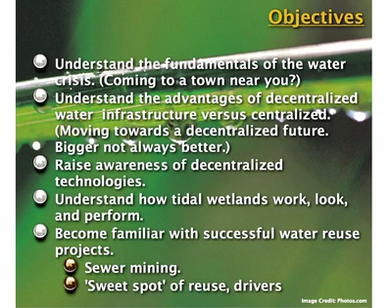I'm going to explain how tidal wetlands work, look, and perform, and then I'm going to review successful water reuse projects and introduce the concept of sewer mining, and maybe most important, what is the sweet spot of reuse, meaning economically, where do the systems make the most sense?

In addition, we'll hopefully have time to walk through the water reuse planning tool, which I think will be very helpful and remove some of the mystery. It's complicated, but it's not rocket science.

I will touch on some of the new regulations that might be moving east. It turns out that California, with Title 22 reuse standards, as well as some new ordinances in the city of San Francisco, should be of interest, as many water regulations start west and move east slowly. And then we're going to touch briefly on a recent EPA and WERF, Water Environment Research Foundation, study as well.

Please don't hesitate to ask questions if you have them. Let's start off with some slides, and the purpose here is to just put the water into context.

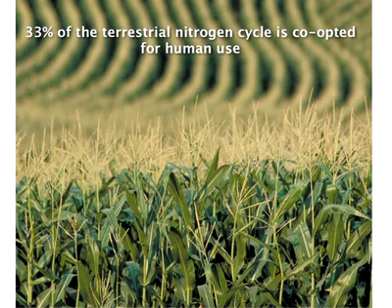25% of the terrestrial rainfall is co-opted for human use. That's a lot of water that we're taking out of the water cycle. 33% of nitrogen is also co-opted for human use. There are over 850,000 dams in the United States — kind of an amazing number.

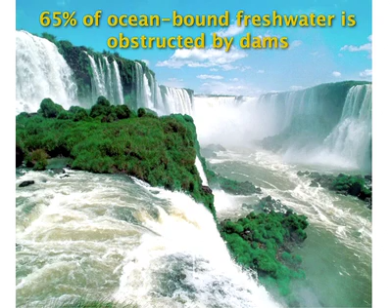Humans have radically changed life on this planet as we know it. In a sense, we've replumbed the planet. So replumbing the planet has its consequences, and we'll talk about some of those in a moment.

In 2012, 25% of the global population lived in areas defined as water stressed. Unfortunately, by 2050 the forecast isn't looking particularly good, in that 50% of the global population will be living in river basin areas with severe and significant water stress. Add to that, by 2050 over 70% of the global population will move into cities, concentrating the areas where water supply is stressed while demand keeps going up.

This probably doesn't relate to many places in the United States, but it is a global problem. In a very large water study by Circle of Blue, 93% of respondents rated water pollution as a serious or very serious situation and getting worse. So yes, freshwater shortages are here, and they're not getting better.

In fact, even in the United States, in a 2008 Gallup poll, environmental issues, specifically water concerns, were ranked 1, 2, 3, and 4 as the biggest environmental issues understood in this Gallup poll.

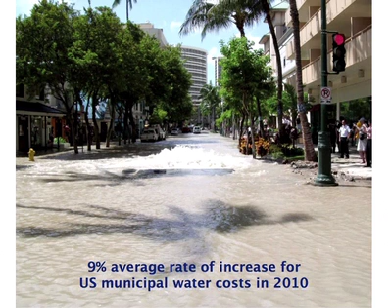Another context idea is that water prices, while relatively cheap in the United States, are going up an average of 9% per year. You throw a couple years and decades into 9% increases, and water will be much more expensive than it is now.

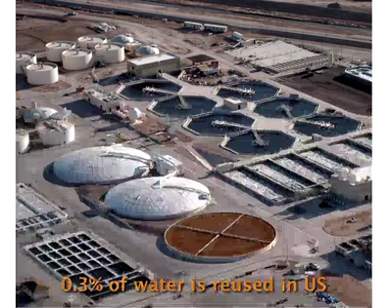25% of the global population, yeah, we've discussed that. So the point is that with these water shortages beginning to happen in the United States—this past summer has been particularly brutal on the whole middle of the U.S., Texas as well—yet we're only reusing 0.3% of all the water we use in this country.

So there are tremendous opportunities to reuse water. In fact,

even Coca-Cola and the largest companies are starting to realize and are now beginning to report, either demanded by their stockholders or by soon-to-be laws in many places, but from a risk management standpoint, even the Coca-Colas of the world are realizing that this global water shortage is significant and becoming more significant rapidly, to the point where it's affecting businesses' ability to predict and plan for the future. So the awareness is increasing, and it's wonderful that we're here today.

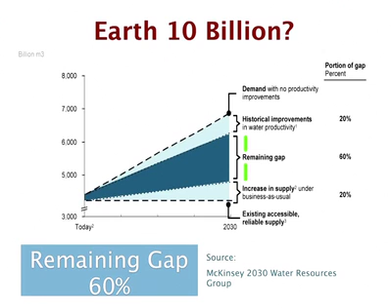In summary of all this, the Earth will have close to 10 billion people in a very short time. The water supply is finite, and this graph shows that even with increases in supply—finding new fresh water we can use, since we're not creating any more—with population increasing to upwards of 10 billion, there is a forecasted very large gap between the amount of water needed for healthy lives for people around the world. We're looking at a 60% gap in the supply and demand of water as this population grows, which is quite significant, to say the least.

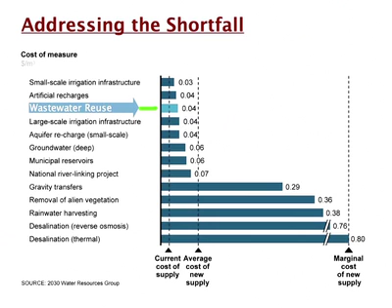Yet we feel, as a company and as an industry, that there are technologies that address this 60% gap, and today I'm going to focus on reusing wastewater as one technology. When I say reusing, our focus today is on non-potable reuse, not drinking water. We believe, as a company and as an industry in the water reuse space, that cleaning up wastewater to an appropriate standard to then be reused on site is viable and practical. Technologically, I won't say easy, but the technologies all exist right now to consider reusing wastewater to guarantee a supply in your local community, taking it chunk by system, to address that gap.

So I'm going to switch direction a little here. Let's review the centralized model, the status quo, if you will, that was invented, so to speak, by the Romans. It's a centralized model, and the most important concept related to it is the once-through concept. Basically, the way it works in most places is we have a source of water, whether upstream, surface water, or an aquifer below, and it's cleaned up to drinking water standards—that's the only standard we have for the most part. Cleaned up, used once, and then flushed down the toilet.

This centralized model has been very productive. From the Roman standpoint, it's one of the things that made them great. They brought in fresh water via aqueducts and got rid of their wastewater via troughs in the street, and it did them very well.

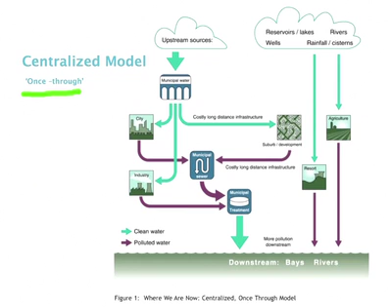But we feel that after 2,000 years, it's time to consider another model that makes sense in light of these water shortages. So this is an example many of you are familiar with: an activated sludge municipal scale wastewater system.

So that's kind of just closing in on that once-through model. Not particularly pretty - you surely don't want to live near one. They can be quite smelly. You don't use aesthetic terms to describe what happens in a centralized wastewater treatment plant.

Which brings me to the decentralized model. Unlike the once-through model, the decentralized model has a couple different threads to it. One is that when we say decentralized, we're in a sense implying reuse. The concept here is that once water has been delivered to a place...

I thought I was active there. I'm trying to get my pointer working here.

So once water is delivered to a place, is there a technology, a pragmatic, economical system to do something with that water on site - clean it up so that it can be reused on site again? That's the whole concept of a decentralized reuse system, an on-site system, if you will.

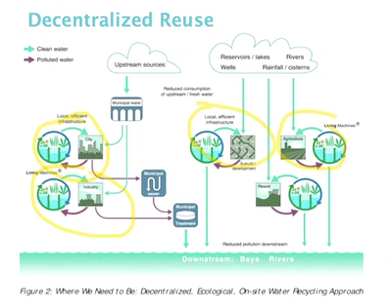So you get the idea. Decentralized reuse has tremendous opportunities in that the water's been delivered, and now there are technologies to clean it up for reuse in a non-potable way.

Which leads us to the history, and where those last slides have really been about is the context of the water problem we have. The technologies exist. We should start thinking about different ways, not necessarily the big pipe solution, but these on-site systems - and there are a variety of systems.

But today we're going to focus from here on in on engineered wetlands. There have been two tracks - where did engineered wetlands come from? And I'm not talking about Mother Nature's wetlands, of course. I'm talking about wetlands that have been engineered to mimic what Mother Nature does naturally.

So there have been two basic tracks of the engineered wetlands evolution, so to speak. One was from the traditional wastewater engineering groups, if you will, and the other is the wetlands engineering, which started out as wetlands, hydroponic systems, lagoons, and buckets of fish and plants. These two tracks of research and pilot programs and installations have been happening concurrently for over 20 years.

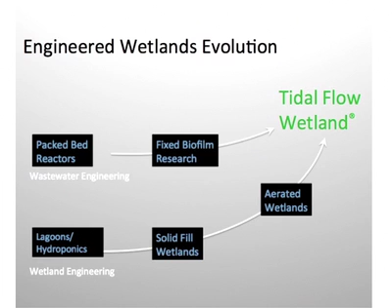The result being, in the mid-2000s, emerging from these two tracks, was the patented tidal flow wetland, which is what I do in my professional life in terms of the living machine. That is a tidal flow wetland, and I'll explain in great detail in a moment what I mean by tidal flow wetlands. The point here is that there have been multiple technologies that have been fine-tuned and are now available today, not 5 or 10 years from now, with multiple projects around the country - very successful projects - and we'll focus on some of those.

Let's talk about some of the key dynamics in tidal wetlands versus other decentralized technologies for wastewater treatment and reuse. On the x-axis, the horizontal, we have the size of the system, the treatment footprint, and on the vertical or y-axis, we have the energy use.

What is implied in this graph is that all these technologies, membrane bioreactor, activated sludge, textile trickling filter, aerated wetland, and tidal wetland and/or living machine, we're assuming, and it's a good valid assumption, produce the same or similar quality effluent.

I'm not trying to make a statement here that this technology does a better job than this other technology. I'm just pointing out that there's a footprint and an energy consumption side worth looking at across these technologies.

So in the bottom we have an aerated wetland, which is an engineered horizontal subsurface flow wetland, for example, versus a tidal wetland. If you notice where we are on the graph, the tidal wetland system is considerably smaller, about one-third the size of a traditional wetland.

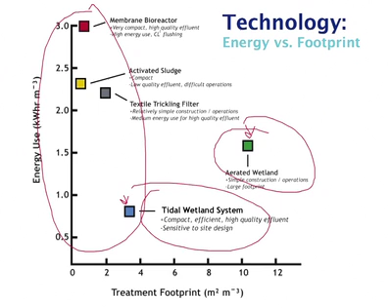So from a footprint standpoint, tidal wetlands are very efficient compared to traditional engineered wetlands, and maybe a little less efficient in terms of space than the mechanized systems. But the real story is here on the energy scale. Tidal wetlands use approximately 25% of the energy of those mechanized systems, and I'll explain how that works and where that number comes from in a moment. But the new tidal wetland systems are generally smaller, and very efficient in terms of energy.

To circle back for a moment, I think this slide was out of place, but the original hydroponic/aquaponic technologies on the left side of the blackboard have been combined with these new tidal wetland systems that were developed by the TVA, the Tennessee Valley Authority, in the early 90s. In fact, these two engineered systems and underlying technology have been combined today into the tidal wetland technology that I'm going to show you in a moment.

So it's not the activated sludge, it's not the municipal centralized system, we're not talking about a mechanized system for on-site; we're talking about a wetlands-based technology which combines environmental engineering, information technology, traditional engineering, and more importantly, it all comes together in an engineered wetland, which is what we'll talk about now.

Any questions? A couple questions came in, and I'm going to look at them and refer to them relative to the slides I'm working on. I'm going to wait to talk about nitrogen and composting toilets. Questions have come in already, and I will address those at the appropriate time.

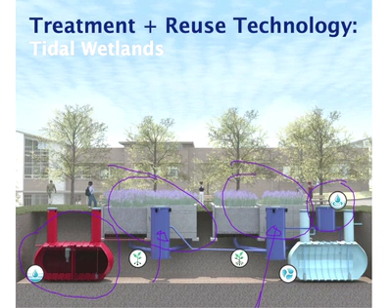Let me go through it quickly. We've got a primary treatment, and I'll tell you in a moment what happens there. We've got a stage 1 wetlands, a stage 2 wetlands. Notice the associated pipe assembly, the pumping system is in here. We also have a polishing module, which includes filtration, generally chlorination, and we have a reuse storage tank. So that's the basic flow, and let's talk about what goes on in this primary treatment.

Primary treatment in this tidal wetland system has a few functions. The first is that there is a screen, so things that should not have been flushed down the toilet, plastics, inorganics, what have you, are caught here and removed on a regular basis. There's screening, and there is some settling of coarse solids in this primary tank.

The point is that 99% plus of solid waste is soluble. However, there is some settling of coarse crumbs, if you will. We generally suggest that these solids are removed between 1 year and 5 years in that period, not monthly, not quarterly, definitely not weekly. So somewhere between 1 and 5 years.

There are systems out there where this portion has been automated, whereas if there are sewers available, these systems can be designed and built so that there's an automatic flushing of these coarse solids, avoiding the honey dipper, the septic guy, removing some of those solids again on that 1 to 5 year cycle. So we've got screening, we've got some settling, and maybe most important, this is where, in this diagram, we've got flow equalization.

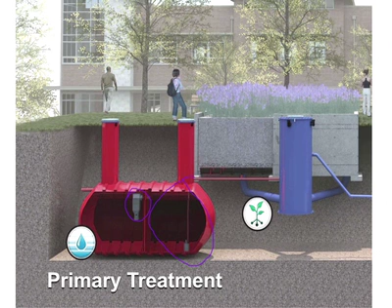This is a two-sided baffled tank, or in some cases separate tanks, but the function of flow equalization is important. It's not as if one flushes the toilet or puts water down the sink drain and that water immediately goes into the biological reactor, the living machine. It goes into this equalization tank, and then the brains of the system dose the wastewater into these biological tidal wetland cells.

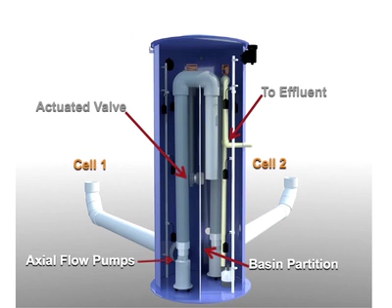The pump module I just referred to is actually quite a sophisticated module, generally outside the living machine cells, these wetland basins. You can see it's a three-compartment cylinder, about a 4-foot diameter, and this pump module is taking its instructions from the PLC that's controlling all the flow in this tidal wetlands system.

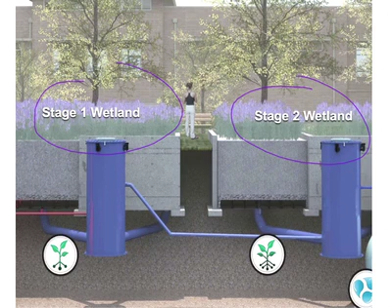Moving through the system, as mentioned, stage 1 wetland, stage 2 wetland, and I'll explain what I mean by wetlands and tidal flows in a minute.

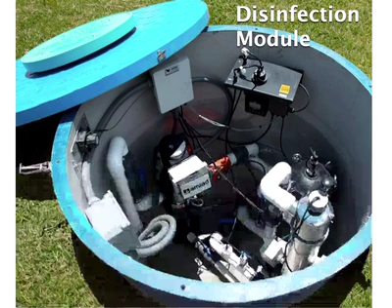Here's a picture of the vault, the disinfection vault, which is the UV. Here's the ultraviolet lamp assembly that you can see looking down in this pump vault.

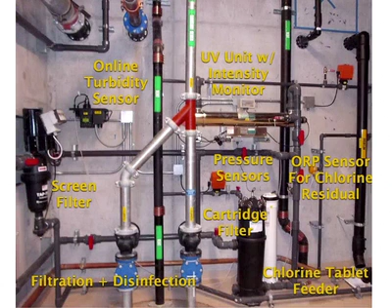This is a screenshot of a portion of the mechanical room in a project I'll discuss at length in a few minutes, the San Francisco Public Utilities Commission room. What we're looking at here is: the sewage has been collected and run through the tidal wetlands and cleaned up, and now this mechanical room has a flow meter, a screen filter, a 50 micron screen filter. There is a turbidity sensor, and the reason for the screen filter and the turbidity sensor, as well as the cartridge filter, is to reduce turbidity down to really almost non-existent levels.

This is so that the UV, the ultraviolet unit, can make sure it gets to all the bacteria, if there are any, and zaps them with that ultraviolet. If there is heavily high turbidity in the water, it's possible the UV will not be able to do its job. In addition to the UV, there's also an ORP sensor for that chlorine residual. So the water is leaving the living machine and entering the mechanical room here, and is then cleaned up, monitored, chlorine is added, and then it goes into a water reuse tank, which eventually the toilets and urinals are flushed with.

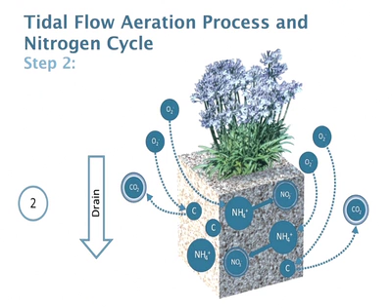Which gets me to the point: the cell then drains, and air replaces the water. Oxygen in the air is delivered through the voids, the spaces between the rocks, and the microbes, the biofilm, use the oxygen and transform the ammonium to nitrate, NO3. That's the beginning of the process to remove nitrogen, known as nitrification.

When that cell is then refilled, again 12 to 16 fill and drain cycles per day, the microbes have started chewing up the ammonium, and suddenly they've got nitrate, and they're eating, and they continue to eat, but there's very little oxygen in the water.

So to complete denitrification, the microbes strip the oxygen off the nitrate to continue oxidizing the waste, and what is released is nitrogen gas, N2.

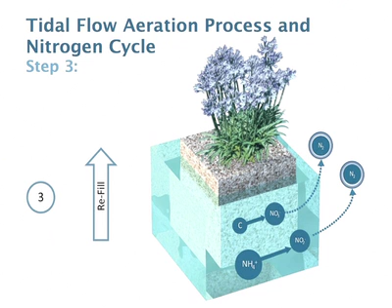So to repeat: we've got NH4, ammonium, entering in the liquid waste stream, and what is released is nitrogen gas. A similar thing happens on the carbon side, the solid waste side. For every molecule of carbon in the solid waste from foodstuffs, there is a molecule of CO2 released. So what we have is a system that takes in waste and releases nitrogen gas and CO2.

No sulfides, no methane, no smell. Without those sulfides as well.

This is another diagram showing another way of looking at what we just looked at. We've got wastewater entering the system. We've got the first cell that's being filled. The ammonium is attracted to the surface of the rocks.

When that's drained, the microbes transform that ammonium to nitrate, and eventually when the cell refills, multiple times a day, that nitrate is transformed and released as nitrogen gas. And again, the same thing happens on the carbon side: no methane, just low greenhouse gas contributing carbon dioxide.

And then what we have here is the ability to reuse. So what comes out is tertiary quality water, and that water can be reused for toilets, cooling towers, and irrigation.

Any questions? Actually, there are a couple of questions. What about using composting toilets and treating greywater separately?

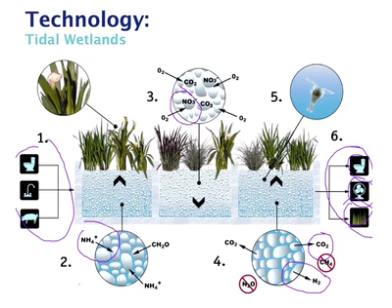Total nitrogen generally in the effluent is around 10. TKN is below 5, and even total nitrogen can be reduced further through the design and engineering of a tidal wetland system.

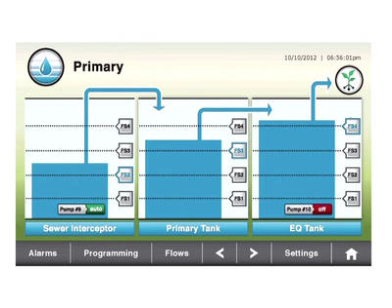This is an example. If you touch the primary tank on the previous screen, you get the next screen that looks like this, and it shows you what's going on in that primary treatment. It's an example of that logoed Stage 1 wetlands logo built right into the pump riser, or the riser for the living machine access.

So yes, we're trying to make it simple. We've been told that this new interface is probably the easiest interface in terms of these types of systems.

Other questions? I'm thinking of a small intentional community, 10 homes or less - does it make sense? The answer is yes, it does, depending on the project dynamics, but 10 homes starts making sense. For a tidal wetland system, there are other technologies that also make sense. But it's important to mention, and I'll show this in pretty strong graphic terms, that when systems get bigger there are significant economies of scale, and they tend to be more economic with a quicker economic payback. So yes, 10 homes might make sense depending on the project dynamics, but surely the technology works.

I'm going to move to some projects where tidal wetlands have been installed. This is the Port of Portland building. The Port of Portland is the Marine and Aviation Management for the Portland, Oregon Airport. This is their headquarters building. It's a LEED Platinum building, and they have a wastewater treatment plant that you're looking at in the lobby of this 2-year-old headquarters. It was commissioned in June of 2010.

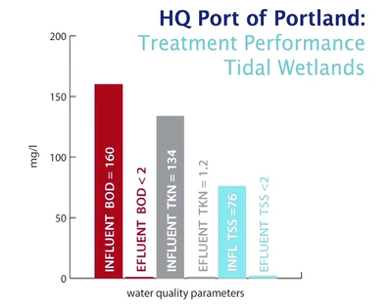So as I said a few minutes ago, the treatment performance of wetlands are on par with any on-site systems and technologies that are available in the market.

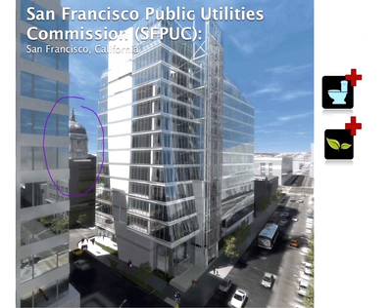Moving along, this is a rendering of a project that has since been built. It is in downtown San Francisco, the Public Utilities Commission - the water, sewer, and power authority for the city. This is their brand new headquarters, and you can see City Hall in San Francisco nearby. We've got a wastewater treatment system in downtown San Francisco for the water, sewer, and power authority, serving 950 people in that building.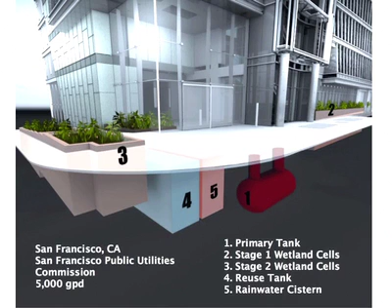This is what the building looks like, and the flow is: there is a primary tank - for illustrative purposes it's shown here, but in fact it's in the loading dock around the corner. So there's a primary tank, a trash tank, and a flow equalization tank.

The brains of this tidal system then introduce that wastewater to the stage 1 wetlands, known as number 2 here. After a period of time in the stage 1 wetlands where we have cell A and B, meaning we're filling and draining alternately. Interestingly, the majority of the BODs are removed in the stage 1 wetland. But the system also has a stage 2 wetland, where most of the denitrification takes place, and then there is a water reuse storage tank.

This is the system I showed the mechanical room for a few minutes ago. Now I'll show you the living machine - this is that stage 1 wetland. It is outdoors under the building eave, and again, we're talking about a block and a half from City Hall. So we're looking at a stage 1 wetland, reciprocating back and forth multiple times a day.

After which it is pumped to the Stage 2 wetlands, and Stage 2 wetlands has a couple different pieces actually. This gentleman sitting here doesn't realize he's sitting on the edge of a wastewater treatment system - this is the beginning of the Stage 2 wetlands. So we've got cell 2A where this guy is sitting, cell 2B here, and then cell 2C, further down the street on the sidewalk side, which is actually both an outdoor and indoor system.

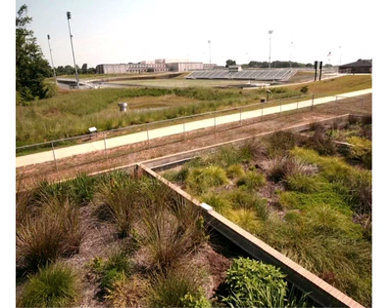Moving on, this is another tidal wetland system, in Greensboro, North Carolina, where I reside. We are looking across the tidal wetlands, across a stormwater management area, onto an irrigated baseball field. This system takes all the waste from both the middle school and the high school. They collect rainwater from the roofs of the high school, as well as the middle school behind the camera. That harvested rainwater is stored in a cistern below the basketball court that you can't see here. That water is pumped from the cistern to the toilets and is flushed into the living machine, and all that waste is used for subsurface irrigation for a variety of athletic fields on this public school campus.

I also use this as an example to point out this lovely 6-foot chain link fence. This was demanded by the regulators, and I find it interesting that we had another project in Virginia for a high school, and rather than wanting to sequester the tidal cells, that design team requested that the tidal cells be in the forecourt of the building so students could sit on and congregate around them. It's an interesting and different regulatory approach, since there are no national standards. Wherever these systems are put in, working with and through the project team and design team, and with local regulators, is part of every project.

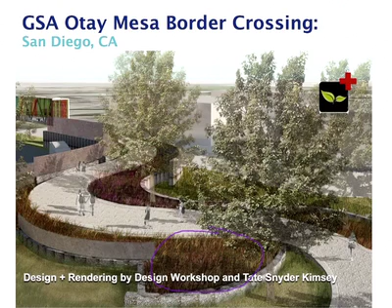This is a rendering of, again, a wastewater treatment plant—not exactly what one would think. This should be built in 2013. It's for the Tijuana border, the U.S. Customs House at the Tijuana border crossing. You'll see what the containment units or cells are made of—in this case, they're designed with Gabion rocks. I don't think many people, even given a multiple choice question, would guess that this is a wastewater treatment plant supplying water to be reused for the toilets and cooling towers.

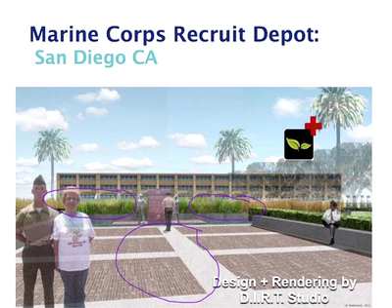This is a project that is in the ground now. Sorry, I don't have updated pictures. In fact, the grand opening is today. This is the Marine Corps Recruit Depot in San Diego. This was an existing monument, a drill instructor monument at the base, and this is a sewer mining project—rather than taking the waste from a particular building, a pipe leaving one building, here they cut into the sewer lateral, the sewer main, and are dialing in 10,000 gallons a day, which is cleaned up in this tidal wetland, built around what was the existing hardscape. The monument was here already; the planter boxes, the living machine, the tidal wetland boxes, were put in after the fact, taking 10,000 gallons a day from the waste stream and using it for irrigation of this ceremonial site, the drill instructor monument.

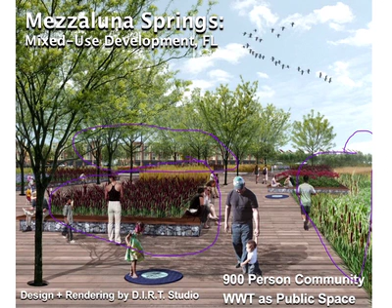This is another rendering of a mixed-use, very large residential project going into the panhandle of Florida. This vision picture addresses the community approach, where there is no water and sewer infrastructure in this area. There are 12,000 military families moving into the area, and this developer is trying to create not only a whole community with a town center, but do it very ecologically and realistically while managing the water. Where these people are sitting, in the middle here, is the wastewater treatment plant, the tidal wetlands, taking the waste from this mixed-use area. There's an amphitheater here for upwards of 900 people. The cleaned up effluent will be pumped back into the buildings for toilets, as well as for this disturbed wetlands area that needs to be rehabilitated. This is an example where, without infrastructure, local decentralized wastewater processing is very appropriate, and it also helps recharge some of the impaired wetlands. That's something we're going to be seeing more and more of.

Another thing about these systems gives me an opportunity to talk about residential systems built out over many years. One of the negatives about centralized systems is that you build technology for 20, 25, 30 years ahead, and you build that all now, and eventually the capacity will be needed.

But in these on-site systems, it's very possible, or I should say very appropriate, that the systems are modular and that they're built to grow along with the community growing.

So the whole sewage, tidal wetland infrastructure does not have to be built up front with all the associated costs, as long as it's thought of and designed and planned for the future. For example, as these 60 units in this commons are built, they will be building additional tidal cells to handle the increased capacity. That's really a way to manage infrastructure expenditures over a longer development time than putting it all in up front.

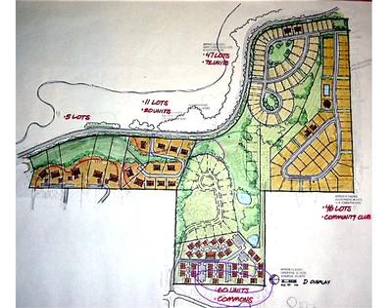Let's see what other questions have come in. I talked about nitrogen. I think it's time to move on to the planning tool.

So what I've done here is captured a whole bunch of screenshots to show a water reuse tool that is available. If you let me know, I'll be more than happy to give you access to that tool. It is a web-based Google Doc, but I'll give it to you in these screenshots.

The first thing is trying to run a project scenario in order to find out what it's going to cost, what's the payback, what's it going to do, how big is it, what does it look like, and so on. So I'm going to walk you through somewhat quickly a series of screenshots that were just captured from a live water reuse scenario.

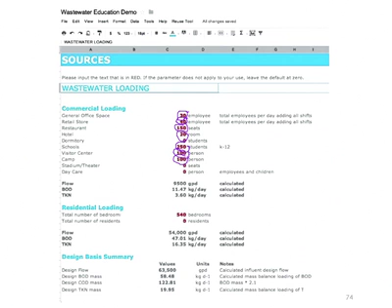And in fact, that's what these systems are engineered around. Flow is very, very important, but most important is the actual loading, and making sure there is enough capacity in the tidal system to handle that wastewater load.

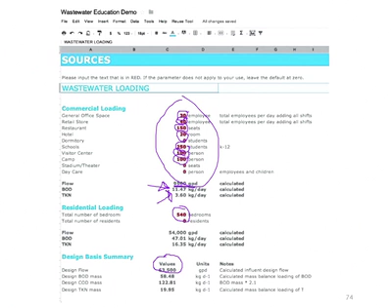So in addition to those commercial parameters on this theoretical project, we also said 540 bedrooms, and that accounts for 54,000 gallons a day. So the total project we're trying to get a feel for here is 63,500 gallons a day, with the associated mass loading.

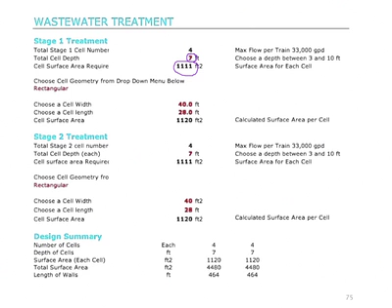So then what we do, the system tells us that if the cells are 7 feet deep, we will need 1,111 square feet per cell. So I went in there and said 40 by 28 is pretty close, so we get 1,120 square feet per cell versus 1,111. That's very close, and we've done the same thing for stage 2.

So you might not know this, but the system knows that when we want to treat blackwater to a reuse standard, it will take both stage 1 and stage 2 treatment, and I did the same thing here in terms of designing the rectangles, the boxes, the tidal cells.

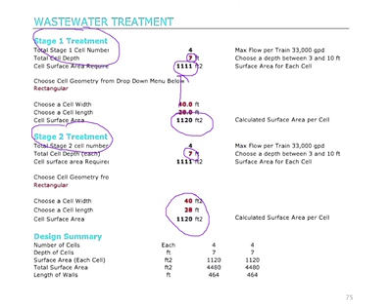You can change the 7-foot depth. That is the default for the system, but we have designed systems that are deeper and therefore smaller in footprint, as well as shallower and larger in footprint. So we basically said this is the wastewater source of this property.

And the summary is that it's 63,000 gallons a day, and you saw that already. All right, so we've defined the sources. To give you some insight, where did we get those numbers from?

So, for example, general office space. Our experience, as well as a combination of Metcalf and Eddy textbooks, basically says that with new low-flow fixtures, we can expect 5 gallons per day per employee in an office setting. That's based on an 8-hour FTE, full-time equivalent. If there were 2 or 3 shifts, you would double or triple that. Notice also that with general office space, the BOD count is actually quite high.

And it makes sense, because most of what leaves an office building is sewage. So between the TKN at 100 and the BODs at 300 milligrams per liter, general office space is what's known as a highly concentrated wastewater stream.

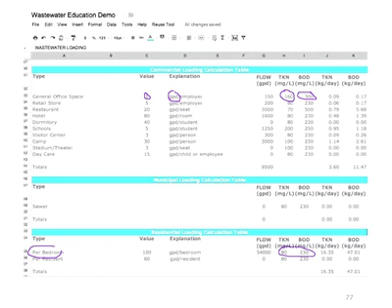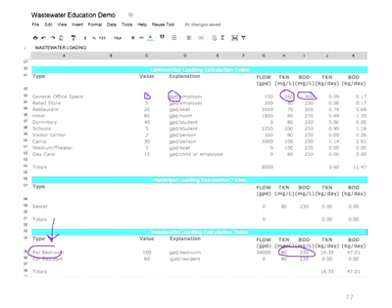Compared to, for example, on a per bedroom basis, it's 80 on the TKN and 230 on the BODs, and that's because this is a residential situation, which includes toilet use, but also bathing, laundry, cooking, washing, and all kinds of large dilution factors. So the tool shares with you what these conversion factors are and the associated waste flows and loading constituents.

So we're done loading the system. Now we're saying, well, we just said we're going to reuse the water. So for this example, we've got 100,000 square feet. You have an option in the tool to have multiple zones with different landscape coefficients.

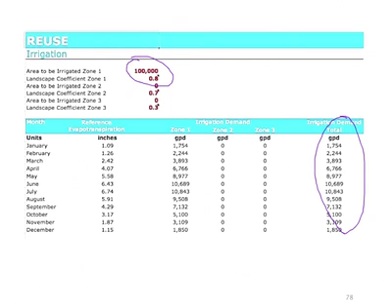And if you remember, we set this up for Pittsburgh, so you'll notice this is the daily gallons per day in monthly buckets. In January, the daily 100,000 square feet in Pittsburgh can handle 1,700 gallons a day, that's subsurface irrigation. That's obviously not a lot going on in January, but we can still get rid of a little bit of the water we've cleaned up in this theoretical example.

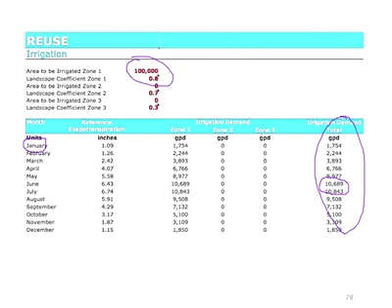By the way, that daily demand in gallons goes to 10,000 and change in June and July during the growing season. So we defined the source of the wastewater and the parameters of that wastewater. Now we're defining the reuse, and here we're looking at irrigation. In addition to irrigation, we're going to plumb the toilets.

In this case, 300 of those people, we're going to plumb the toilets with that reclaimed water. And then, just to make sure the teaching moment works, I'm saying there's another 10,000 gallons per day of non-potable reuse opportunity.

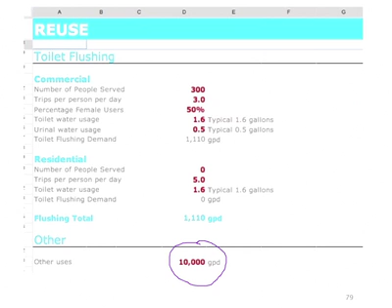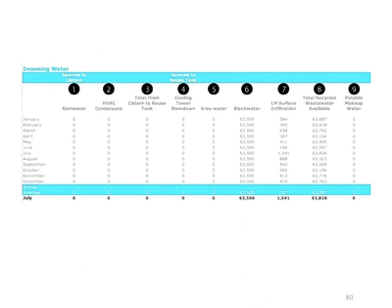Keep that in mind, because I'm trying to show you how the tool works, but that could be cooling towers, truck washing, dust control, and other secondary water reuse opportunities. So we get an incoming water summary, which says we've got 63,000 gallons a day of blackwater.

There's a little bit of surface infiltration, and that's what the water that's available. And this is what this particular...

Knowing that it's never perfectly balanced, because generally in North America we get the rainwater when we don't necessarily need it for irrigation, meaning we get it in the winter when we don't need it, and we don't necessarily get it in the summer when we can need it. But again, it is regionally specific. But here we have a situation where we have a lot more supply than demand.

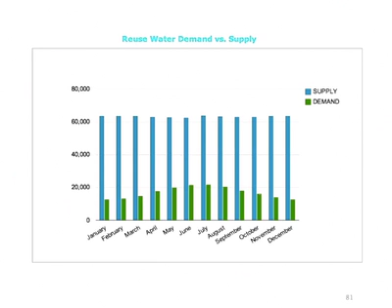But this is realistic in my day-to-day. It's very often that we have the supply and not necessarily the reuse, and to make the systems as economical as possible, your demand should be as close to your supply as possible.

Moving along, we then get a cost estimate, a set of costs. And again, this is a theoretical product, but the system is 9,000 square feet, a little under a quarter of an acre for 63,000 gallons a day. You can see what the effluent quality is for BODs and turbidity.

You can see what one section, in this case the living machine, what that portion costs, and then you can see what all the portions cost. So you've got the system construction, you've got the primary treatment, you've got the disinfection system, you've got the engineering cost, you've got the oversight commissioning costs, and so on.

So somewhere in grand total about $1.1 million to $1.3 million is what a 63,000 gallon a day system would cost. And interestingly enough, and this is probably the most powerful part of the tool, we're working with screenshots here, but what's the life, what does $1 million or $2 million mean relative to the cost of water in the volume? Do you get an economic payback?

So, if for this particular theoretical example, the idea is, do they hook into a faraway traditional centralized system, or can they avoid those costs? In this case, the avoidance costs are $875,000, which will have a significant effect on the ROI, or on the payback. So while water is cheap and sewage is relatively very inexpensive compared to other parts of the country, we still have a lot of water we can use, and we might be able to avoid $875,000 in sewer connections for all those units.

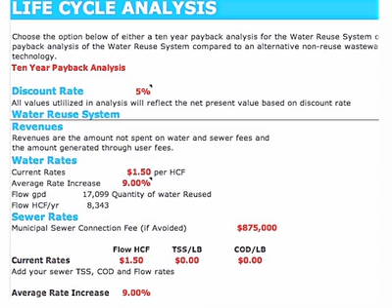All those residential units. In addition, we plugged in $40 per month per household for the wastewater treatment, and so that's a revenue, if you will, of $168,000 per year. And we also put in a $20,000 per year employee to operate. Generally, these systems need about 4 to 5 hours a week to operate, and hopefully it's a staff person, depending on the type of project and community, that can do that. If not, there are third parties and companies that can do that.

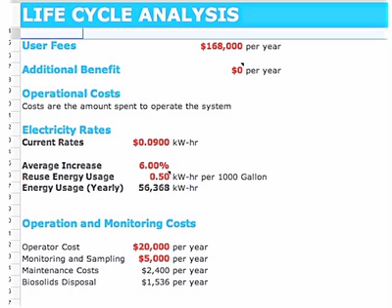So we put in all the sources. We put in the potential reuses, some of them. We don't have a balanced system just yet. We then plugged in the cost of water, the cost of sewer, the avoidance costs, and what it comes out to is that the system basically averages about $1.2 million, and here's the interesting thing.

Because of that give back, or I should say that avoidance cost of $875,000, and again, I'm not making a statement here that this is a budgetary cost estimate. I'm showing how the tool works, but it's a fantastic tool in the sense that with that avoidance cost of $875,000 plus $168,000 a year contributed by the user community for this system, the payback is less than 3 years. Again, this is theoretical, but I'm trying to show how the tool works.

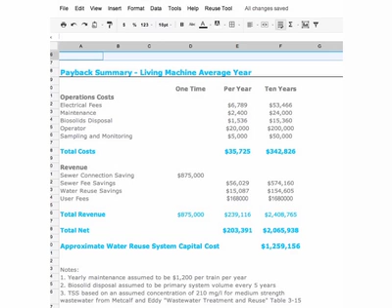In addition, the tool actually shows what the components of such a system would look like, not to scale and size, because if you remember, I did give you a size. It was about 8,500 square feet of above-ground footprint for these cells. But again, the tool here shows you a process diagram for a two-stage reuse system.

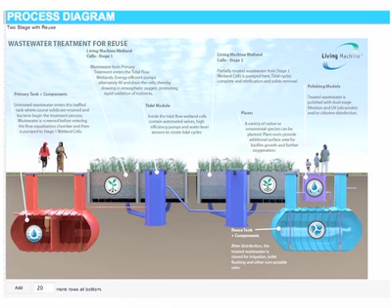With reuse, if there was no reuse, this would just be a straight pipe into the ground. The summary sheet in the tool says that at 63,000 gallons a day, roughly 23 million gallons a year, we've only found a home for 6.2 million gallons a year in terms of the reuse opportunity. So that's a big opportunity, but it's not necessarily a deal breaker in terms of payback because of those avoidance costs as well as some of the revenue earned.

The difference between 6 million and 23 million is really disposal. So we're going to have to do something. The system is going to have to be designed to dispose of, if we can't directly reuse in non-potable form, a disposal system in the ground. There are a whole variety of disposal systems, and I understand Tuesday's sessions have talked about distribution systems in the past. So lots of opportunities to find something to do, but nonetheless, we have a wastewater treatment system that can avoid the heavy costs associated with hooking up to the municipal plant and the greenhouse gases associated with moving water long distances. In this theoretical example, there's about $1,600,000 savings in just the first 10 years.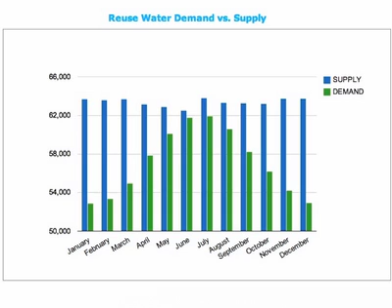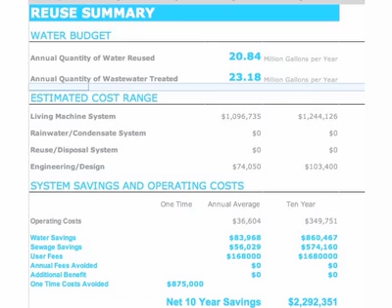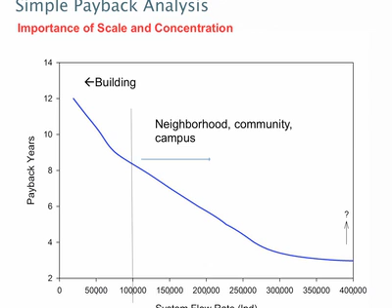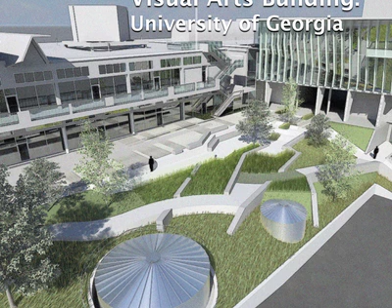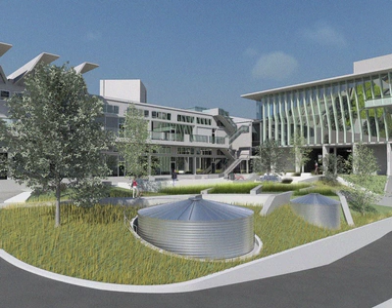Just finishing up with a couple more, this is a beautiful rendering of a combined integrated water management system on a college campus. These circles, these cylinders or cisterns, store the rainwater coming from the roof of the building, and surrounding those rainwater cisterns are individual asymmetric tidal wetland cells, which are the blackwater wastewater treatment plants. I think it's interesting - as I've mentioned a few times, these tidal wetlands are part of the site aesthetic and add to the beauty of the site, and don't necessarily need to be hidden away. Again, no smell - these tidal wetland boxes can look like anything, as you can see in this rendering. Here's another view of that shot. So we've got a wastewater treatment plant in the quad along with a rainwater storage system.

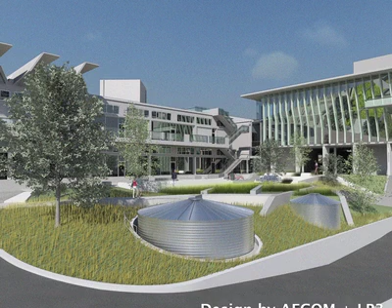The work that wastewatereducation.org is doing is fantastic. There are a lot of opportunities. Technologies exist, expertise exists all over the country. And that's the purpose here, to show that these are no longer systems out in the future. It all exists for professionals right now, here and now, to start thinking about decentralized reuse systems. Thank you.

Thank you so much, Scott. I think anybody who has sat through these slides will be absolutely amazed at what's possible, and the idea of sustainable integrated water management, including wastewater, is really what our focus is this year. We recently published our 2012 through 14 strategic plan with a very simple theme: it's all connected, and it is.

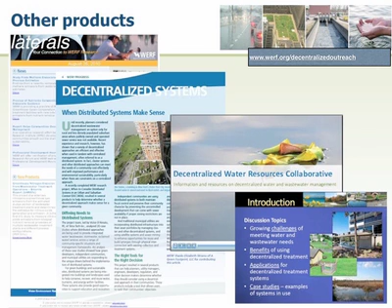And I believe, Scott, that you sat through a couple of the WERF recent webinars, and I think those are available on the WERF website. Yes, in fact, well, if I could, there was a recent webinar I sat through discussing in detail the MOU, the Memo of Understanding between the EPA and the WERF collaborators, and it's very interesting. The gist of that webinar was similar, if not totally parallel, to what we're saying here: that the decentralized technologies are here and now. So please work with your local firms, engineering firms, and your partners, and ask for these, quote, alternative systems, because they're becoming less alternative day by day. But when we hear the EPA and WERF talking about these systems, that's a very strong message that this is not out in the future anymore. Okay, and I'm just putting the WERF URL into that site, and I put that up onto the web tour window as well. So again, quick shout out there for WERF.